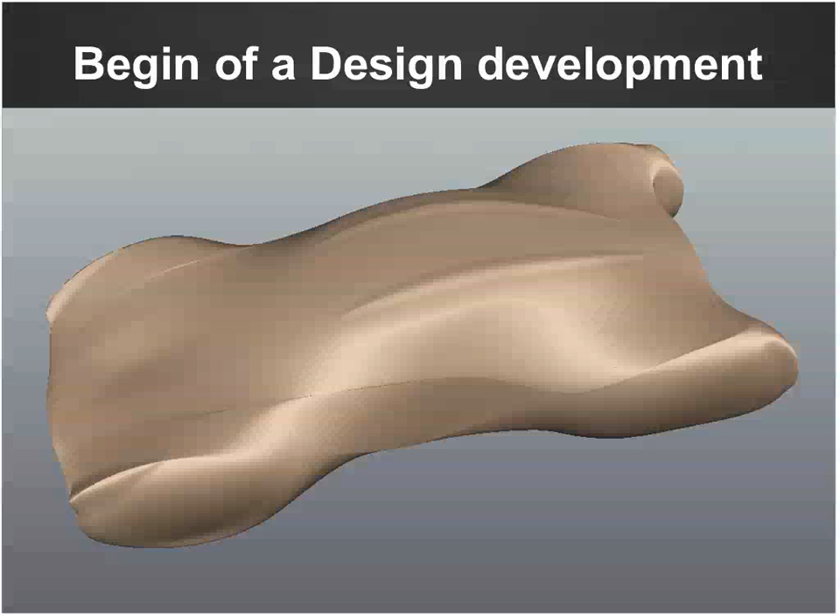Let's start with the beginning of the design development, and we see here that shapes will be created that are just standing for a kind of new design intention, and it doesn't have to be necessarily a shape of a car or whatever, just a kind of form study. This can be done using polygons, a subdivision surface, or a NURBS surface, which is the topic of this webinar. I want to concentrate on NURBS surfacing.

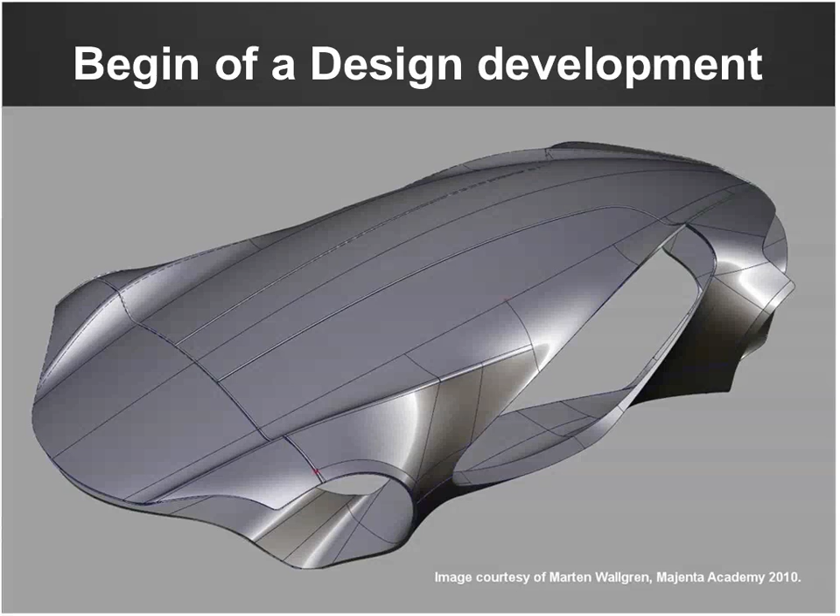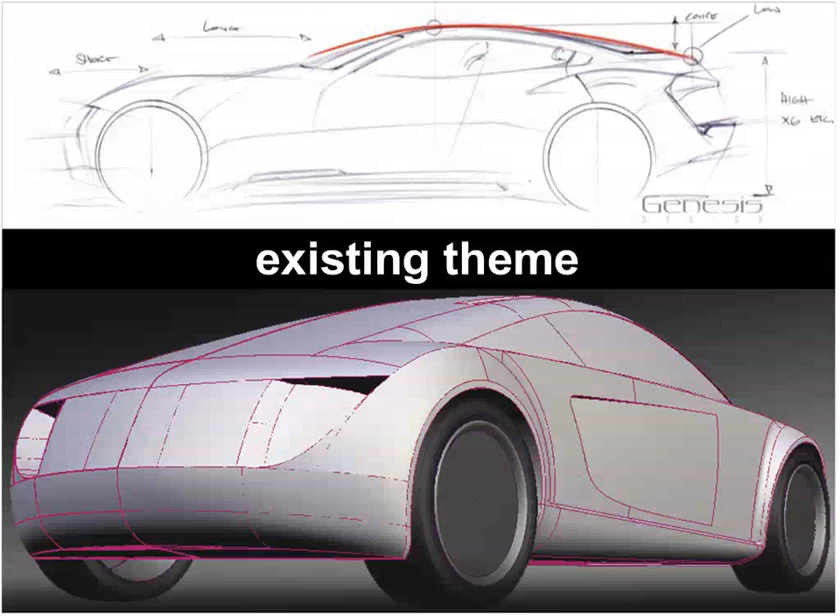The next phase in the design development could be evolving or developing an existing theme. Here we use NURBS surfaces to take several existing themes and bring them down to 3D packages, bring them down to engineering requirements of existing platforms, or combine them and bring them a little bit more forward. This can be done very well with NURBS surfaces, and these models are specific as well.

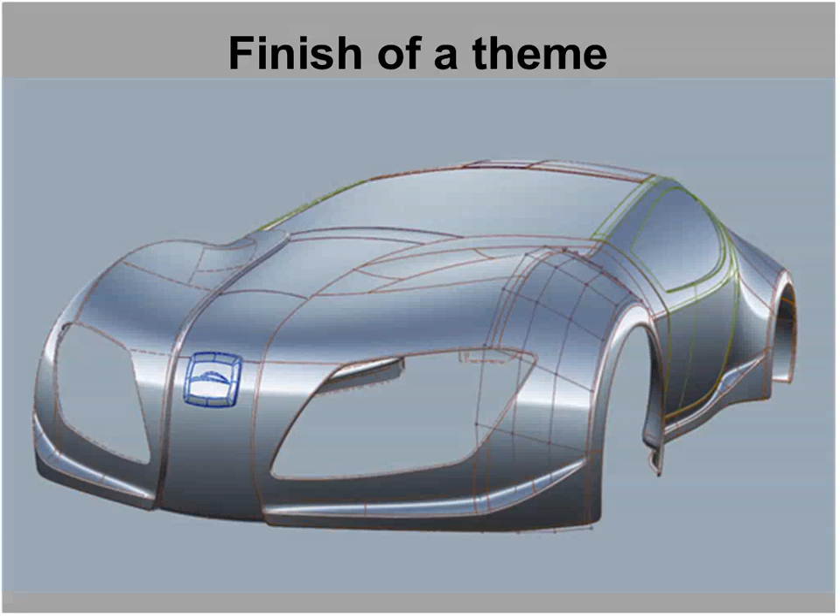And finally, we talk about the finishing of the theme. Here we talk about surfaces that have to be ready for tooling. These surfaces go into production, and they have to satisfy a certain standard. And this kind of standard can be specified, for instance, as Class A.

And here we come to this mystical term, Class A, because what is Class A? I figure that this is a question that many people have when I tour around the world with customers. Everybody's asking, what do you think is Class A? And it's very hard to find that common thing. Class A, at the end, is basically a bar. It's a measurement. It's a level that gives us an idea about the quality of surfaces.

We have to see that this Class A term is very often used, and maybe even came up with the automotive industry. Because in the automotive industry, we have the economic potential, the monetary potential to allow users to accumulate knowledge and to allow processes to have enough space to do Class A modeling. Class A modeling requires certain processes, certain efforts in staff as well as in logistics to be successful.

This Class A term specifies a challenge from my point of view. The challenge is to combine beautiness of surfaces with engineering requirements. So what is beautiness of surfaces? This is totally relative. The beautiness of surfaces can be seen, for instance, in the quality of the highlights, like in the picture that we see right now.

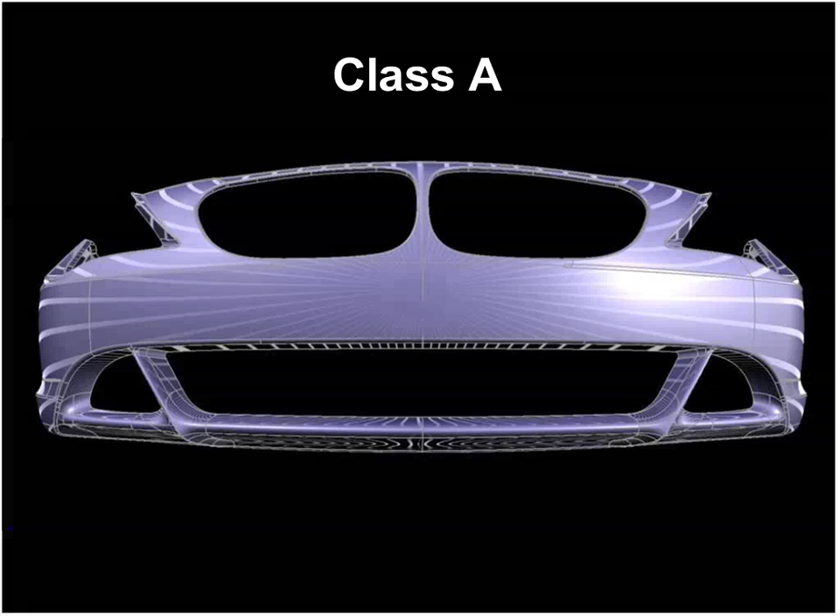So to come to a good model that maybe at the end will be specified as Class A, I am introducing in this webinar NURBS modeling. I can see there are two ways to do NURBS modeling. One way, you can call this direct modeling. That's a very interesting way, because it is very close to what sculptors, what artists are doing with stone, with wood or clay. They shape it like an amorphous material.

In 3D computer modeling, the operator of the software would, instead of shaping the material, shape CVs, control vertices, control points. There are lots of words for these things, and the operator basically starts often with a flat surface. And then he's pushing and pulling the CVs until he reaches the shape that he intends to reach, until he's happy.

When I learned that method, I was told to see the underlying surfaces instead of the feature lines. So when you see a car, let's say a Porsche 911 for instance, it's very hard to not see the beauty, the highlight and the curvy surfaces, but to see the underlying patches. Because we are distracted and we are used to see the feature lines, how they follow. But in this approach, we have to concentrate on the underlying surfaces and how to directly manipulate them. And that's why the word direct modeling.

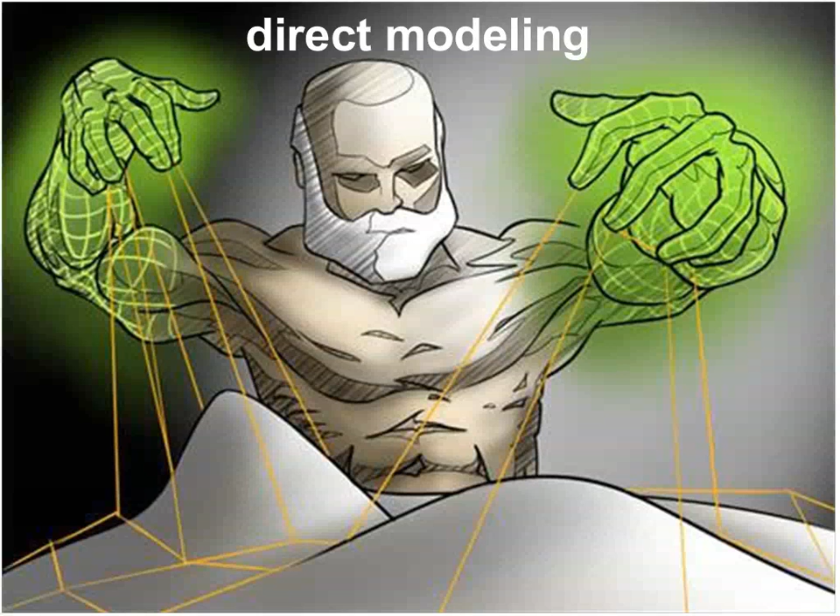Another approach has something to do with artists as well, but more like artists will draw. When you try to draw a car with a pencil on a piece of paper, you will start with drawing lines. Very few guys are trying to outline with a brush kind of shapes, kind of surfaces, or explain the shapes with sections. Mostly they will lay out curves. That's what the procedural modeling method is doing as well. They outline curves, and then they kind of hang in patches between the curves. They create a network of curves, and then they try to fill the network with surfaces.

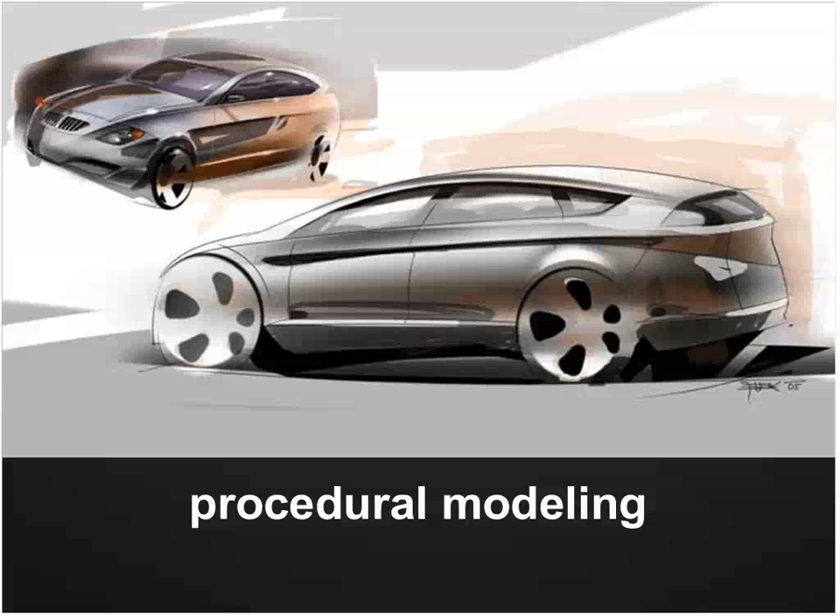Typical procedural software tools have the ability to say one surface should be in a certain way continuous to another surface. They have position, tangent, curvature, G1, G2 curvature, or G3 curvature, and all that stuff. I have to say, I'm coming from the direct manipulation thing. I learned to build a whole car, a whole surface model based on one flat surface. But over the years, I figured out that the combination of both makes me fly in the world of 3D surface modeling on computer.

I'm used to lay out my primary surfaces, my slab surfaces, as simple as possible, as clean as possible, and as light as possible, using direct modeling methods. Then I finish the model with transitional surfaces coming from blend tools, profile blend tools, or fillet tools, which are tools from the family of procedural modeling methodology. So the combination of both brings success. And I talk to lots and lots of people. That's my profession. I'm traveling the world, talking with you guys, and I can summarize that this combination of these methods is the way to go.

Let me right now go into a software. I'm using Alias Surface 2010. I guess that will be a software that most of you guys at least have. And I will do a little bit of work in that. I'm sharing right now my application. I believe that you can see right now a gray model of a car. I downloaded that model years ago from cardesignnews.com. And it is a NURBS model of a car, like everybody can see.

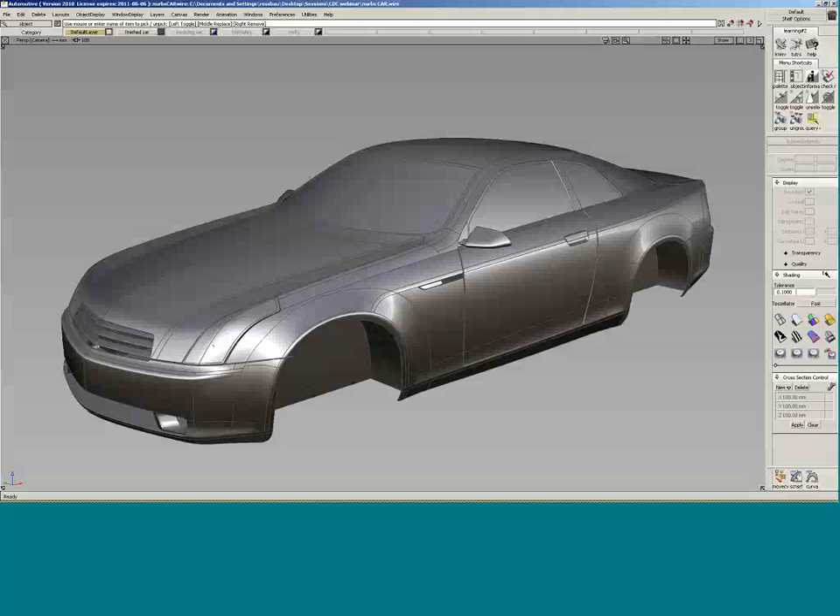But for me as a surface modeler, this car has way too much details to be evaluated. For instance, this car has all the fillets and all the flanges that we can see over here. We can see it over here.

So that is way too much for me to make a judgment about it. And I want to show you what I would do with such a model. So the first thing I did to find a good judgment on a car, I came up with the relevant surfaces. And we can see here the relevant surfaces. These are surfaces with no fillet and that are untrimmed. I want to see the surfaces in their pure appearance.

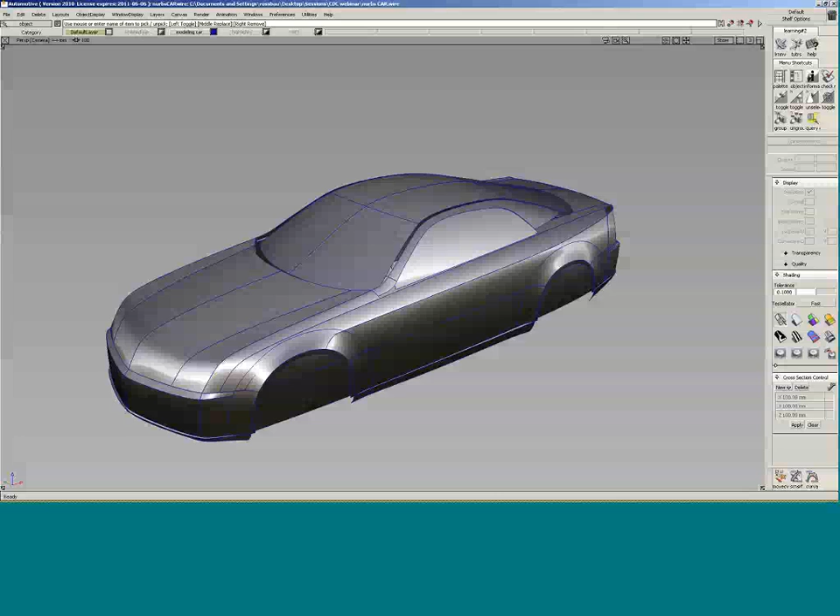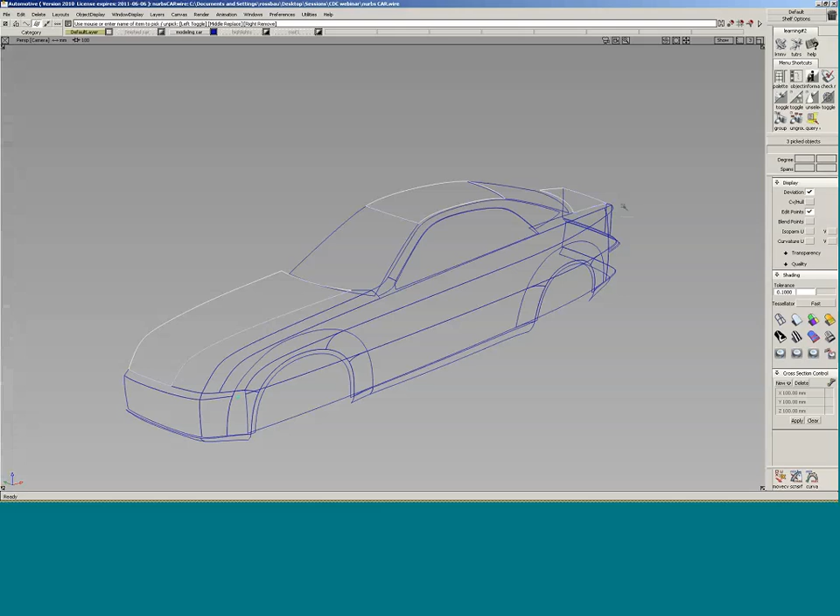And now I'm going to check what this surface model is about. So for this, I turn off the shading, and I am starting with a first kind of check. I like to see the half of the car, and I'm going to check the surfaces crossing the center line. Maybe this and maybe this surface. And there are a few surfaces here as well, so why not check them all?

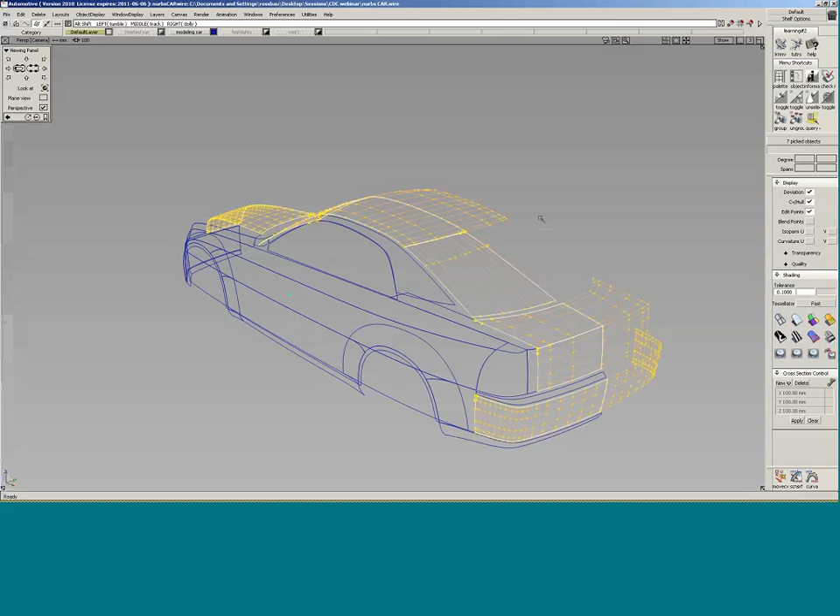And then turning off the CVs, I can see that some surfaces are built across the center line and just trimmed back, and some surfaces are just half, which would be okay, but probably we'll have some issues here. And I'm doing the next thing I usually do with those models. I'm going for the symmetrical view, and I'm choosing flat surfaces. So the trunk, the roof, that's enough, and the hood.

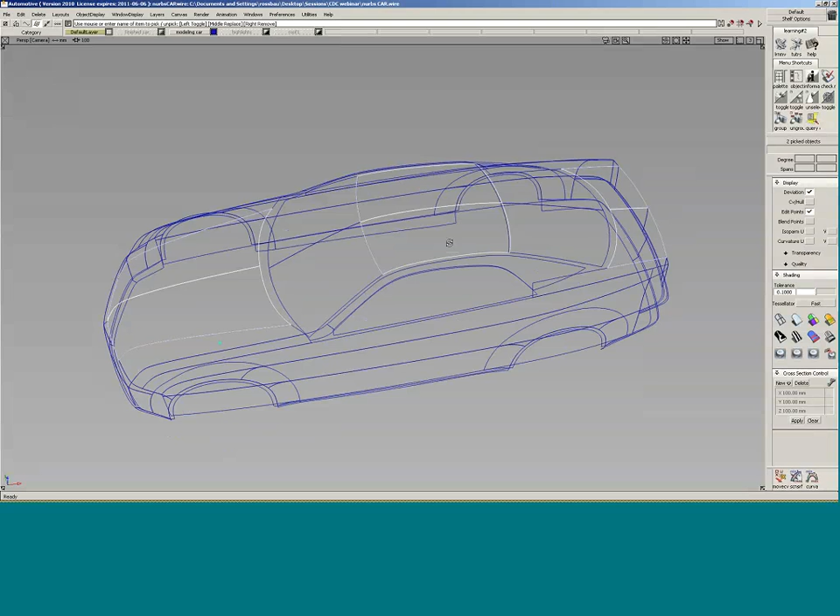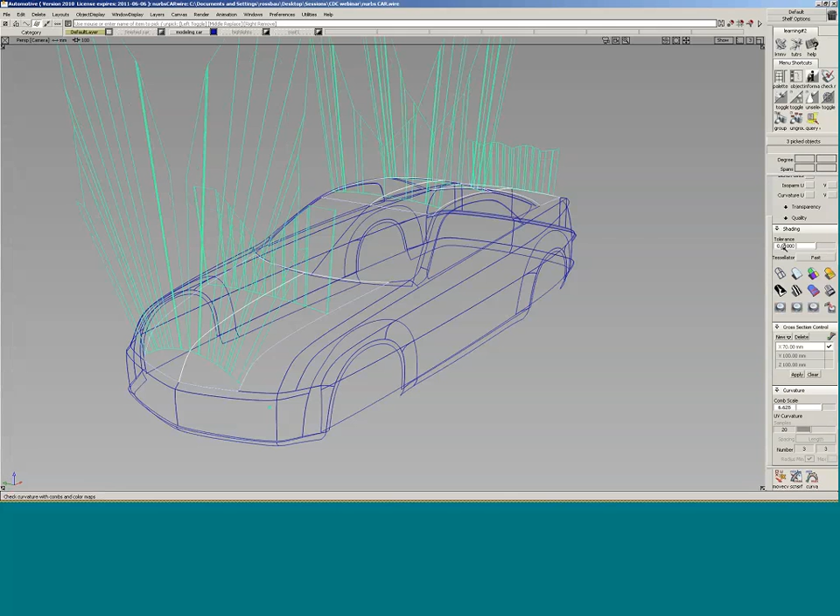And I'm calculating sections on it. Maybe the good thing would be to calculate sections every 70 millimeters. I think that's okay. And I'm asking the software for a curvature plot. I'm raising that, and I'm doing a better tessellation tolerance. Good. Here we are. So what I see from this view is that I have here a certain texture, a certain characteristic. And here I have a different characteristic. And here I have a totally different characteristic as well.

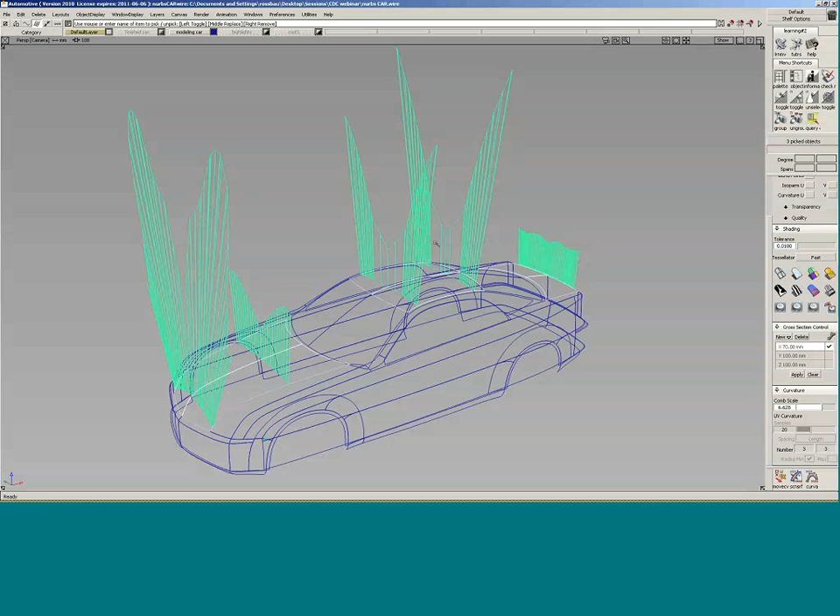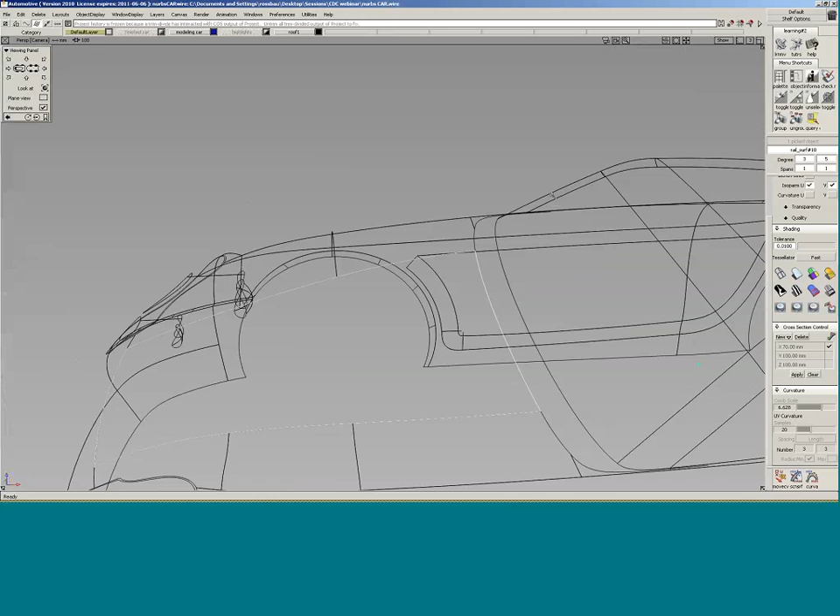So I would say in Class A, we cannot deal with that because we have to find a common thing. We have to find something that is bold. And how that could look like, I'm going to show. I have another model here. It's a real size thing. What I would like to see is something like this. I'm doing exactly the same thing as before. I'm selecting some flat surfaces, and I'm selecting sections again. Probably not every 70 millimeters, probably every 200 millimeters.

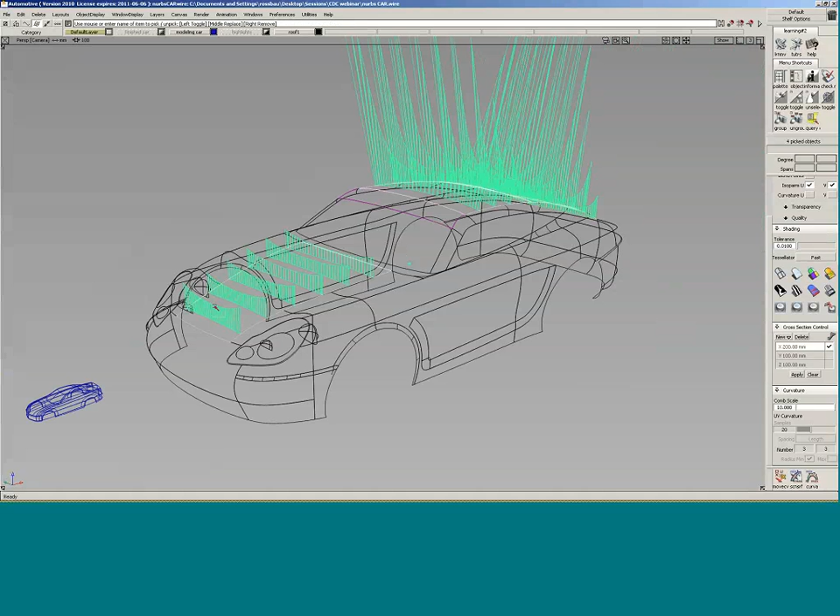That's enough. But what we can see is that the character is basically clear. I always have the same character over the roof, and almost the same character over the hood. So with this model, a Class A modeler could understand how the design wants these surfaces finished, because there's a clear indication of what this model should be about. I'm coming back to the model that I started with. I'm turning off the symmetry. I'm coming to patch layout issues.

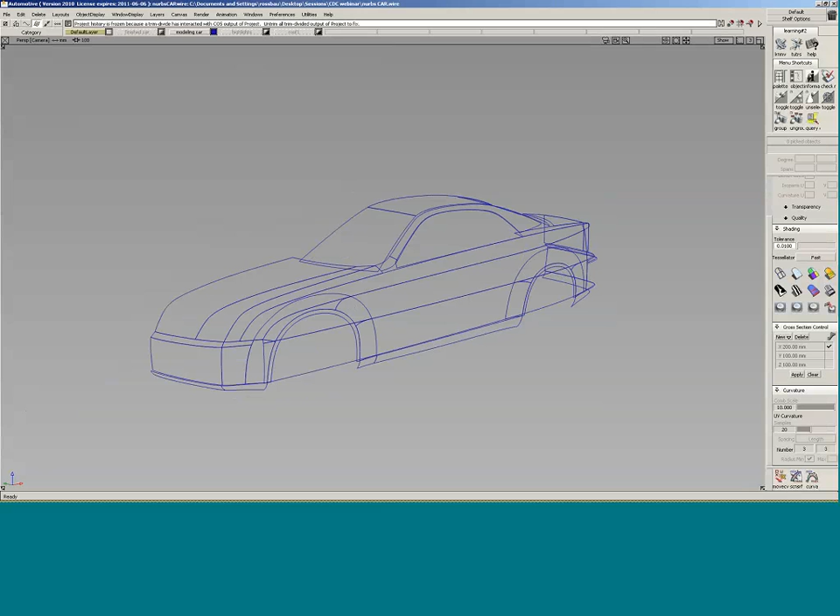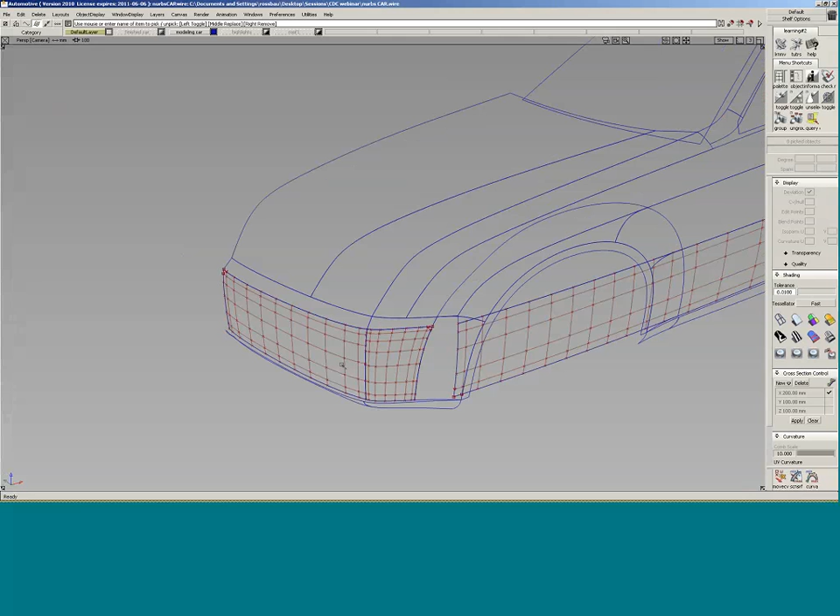I want to point your interest to these two surfaces and these two surfaces, and I turn on the CVs for that. We can see that in that area I have several shapes. Three. I have a flat shape, another flat shape here, and a round shape that should combine the two flat shapes. And it's the same over here. I have a flat shape, a round shape, and a flat shape.

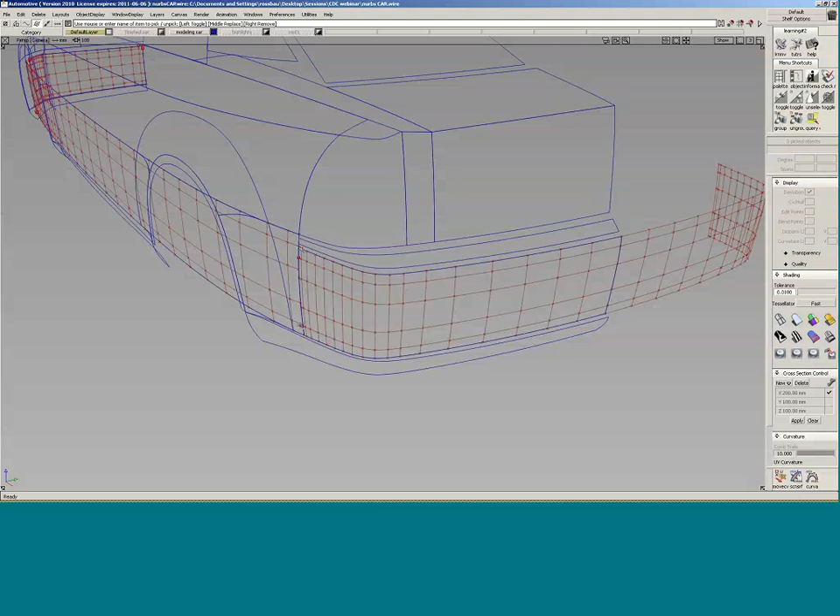The problem right now is when we come to Class A criteria, very often I probably have to change that radius. I want to change it a little bit. Even when it's a smaller detail in the car, I want to change it, but I cannot, because this is one surface. I have to change the entire surface, and that surface division over here might be wrong, because maybe it is here, or somewhere else. Basically, the flat things and the round thing should be visible in the patch layout.

Now you can say, yeah, but with this surface, when I move that CV, nothing happens over here. When I move that here, nothing happens over here. That is right. But this surface is very heavy.

I don't think that the heaviness is a big problem just because of the heaviness. But let me show you this. I calculate sections on this surface here. And maybe not every 100 millimeters, that's a bit too much. Let's say every 50 millimeters. And I get a section there. And I turn the scale of the section up a little bit. And then I do an even finer tessellation here.

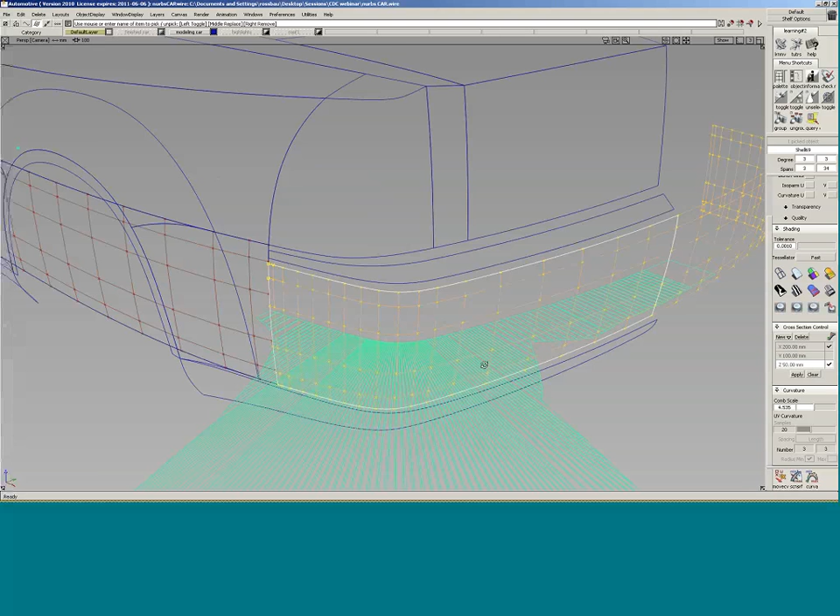So basically what you see here is the shape. Regardless of that thing, I don't care so much for this, and we can debate whether it's good or not. But you see here along this way that that shape has several G3 breaks. That is not good at all. In Class A, or let's say in automotive, you cannot deal with that. That will never be accepted. So that surface cannot work in terms of the internal G3 breaks, plus the form is not

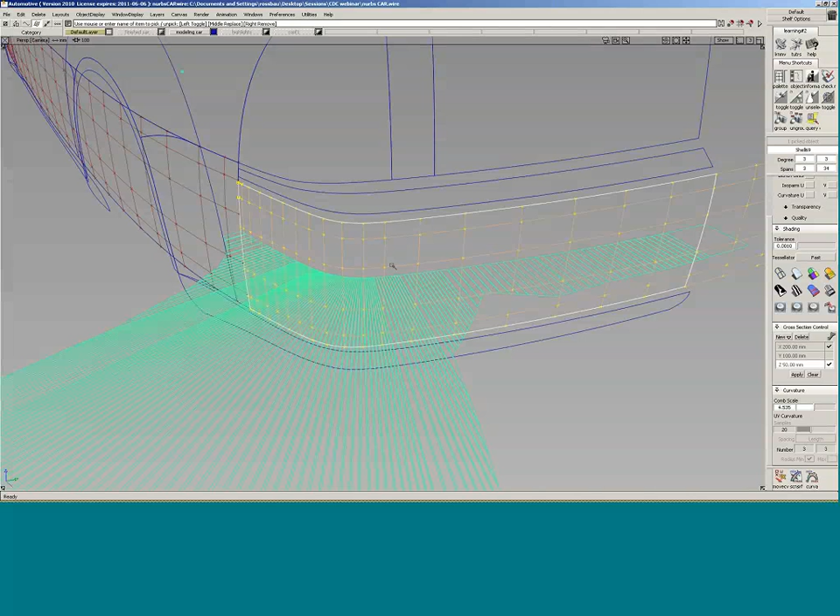correctly interpreted. I saw on the attendee list a couple of guys from the automotive industry, and they will confirm that. We have to interpret the shape, and there are three shapes, and I have to see the shapes in the patch layout. I think that is the message that I want to give you guys. Good. So let's see what is the next thing.

The next thing I'm going to do with those kinds of models, or with any model that I get and have to do something with, is I would like to know what kind of highlights I can see. So let's say I get these two surfaces, and I use hide unselected. I'm using no customization right now, so I want you to see where I get my tools from. I'm using the palette, the evaluation tool, the isoangle tool, and it always appears like that.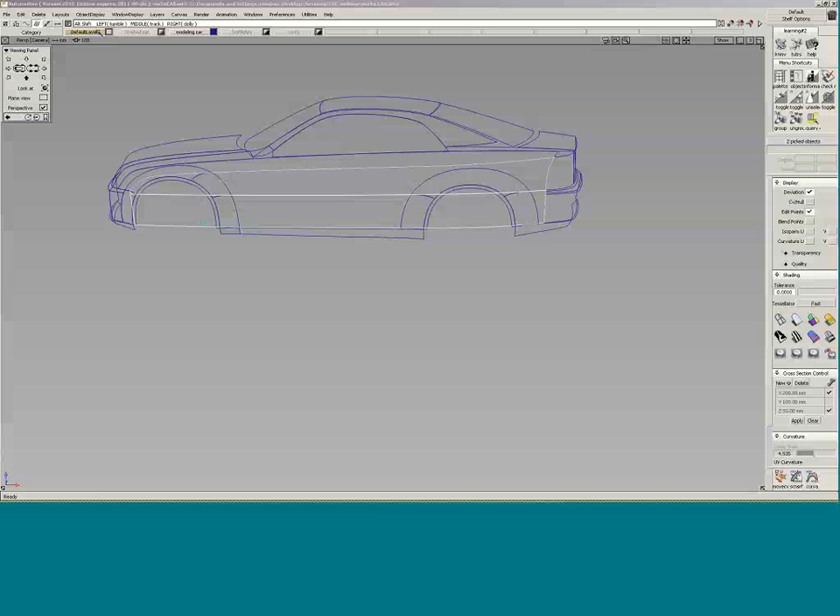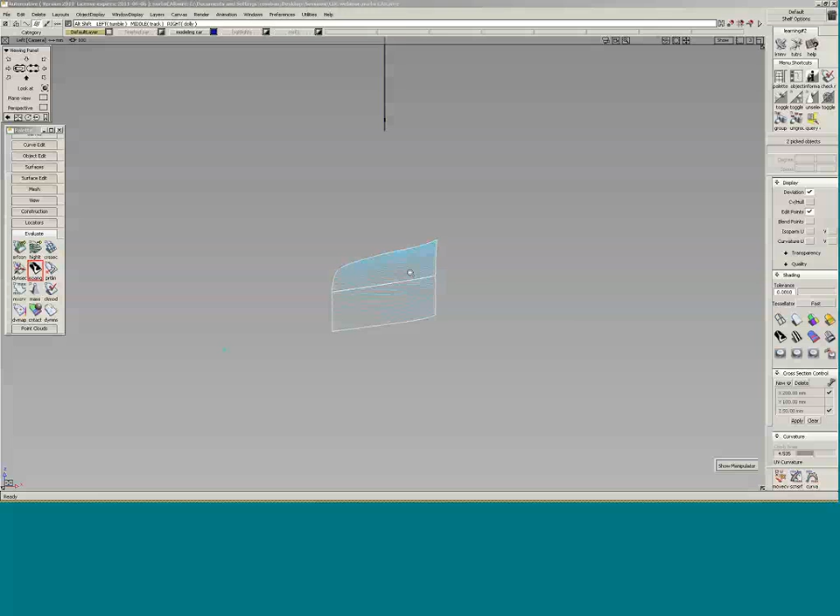So I go for multiple. I want to have many more, probably 35. And I'm going for no shaded surface, but visual curves. And I can probably hide the manipulator. Something like this. That means I can now use the same thing in the viewing panel. I can use a distorted view and see what I see here. And the highlights of the patches here, these are the major patches of the body side, are not good because they are not clearly defined here.

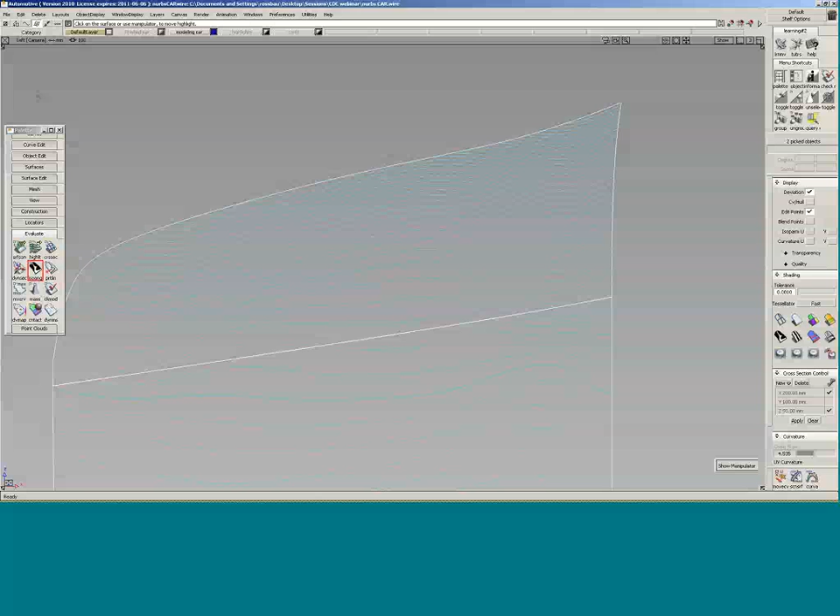So, to make a long story short, these highlights are not okay because they have too many characters: concave, convex, concave, convex, concave again. That's not good. So I would test that. I come back with perspective on, perspective off, and I can delete these visual curves as curves on surfaces. And right now I would like to show you another thing. I think it's a trick.

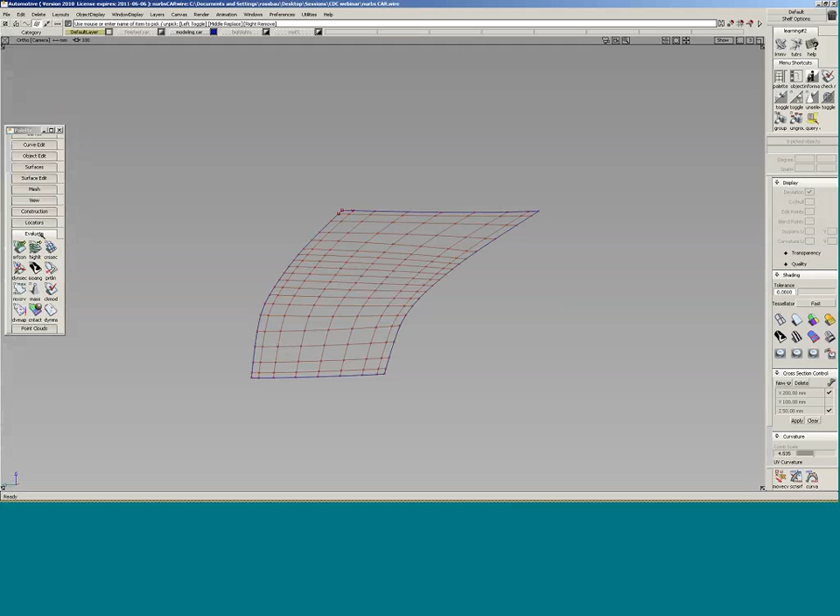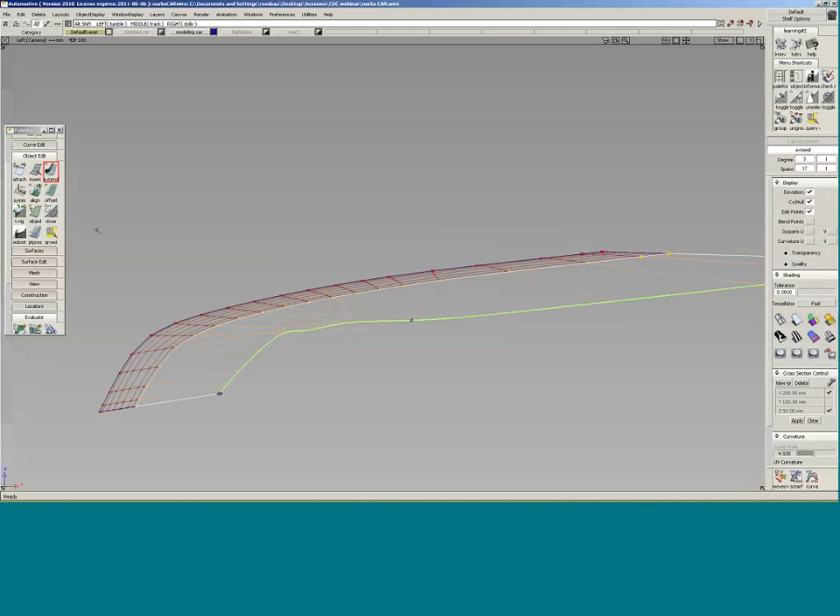Let's say we talk just about this curved surface, and that surface is an untrimmed surface. Regardless of the fact that I don't like it with lots of spans, I can go for object edit, extend with linear on, merge off, and extend that thing very long. So from the side view, I can see that the first hull is pretty okay. It's concave all the way. But the second hull is totally creepy. Sorry for the English word, but it's totally undefined.

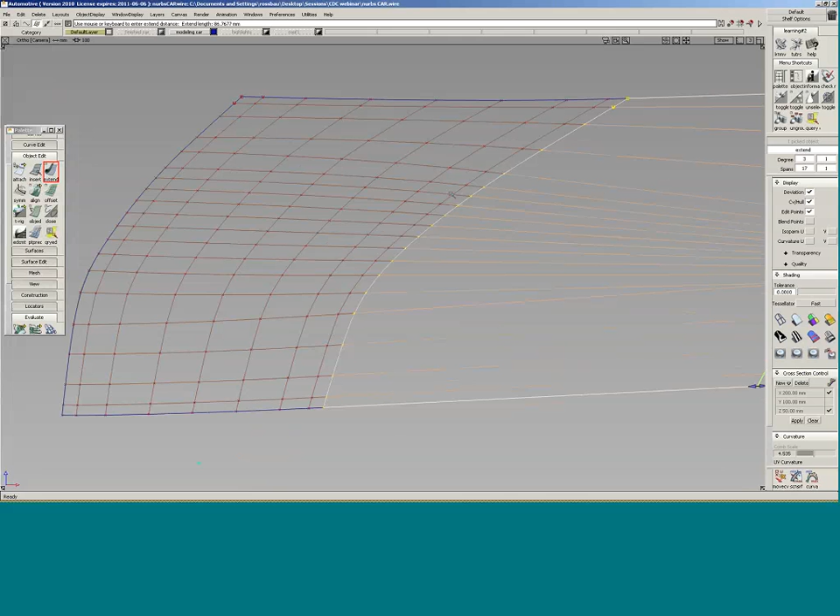It's giving me a clear indication that in that hood here, this line is somehow wrong. You cannot see it, because when you look at this here everything looks nice, and when you see the curvature combs, or maybe even the Gaussian, everything is fine. So there seems to be no problem. But there is a problem, and finally, with the extrapolation, you can see it much better.

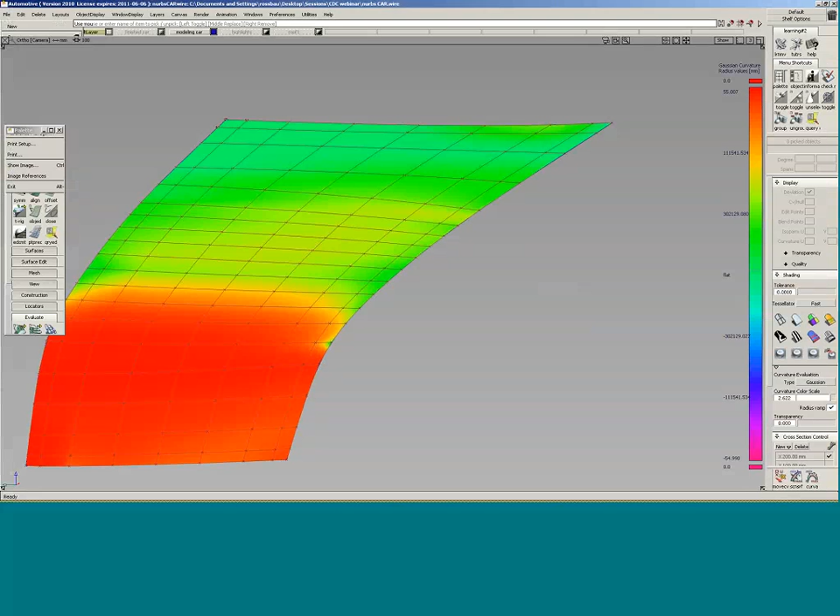And with this, I would love to open another file where you can see something more. This is a file with a fender, and I want to point your interest to that surface, right?

So that surface here looks nice. We do this, we do the vertical, no, we do this, and we put here a little bit more. That surface looks quite okay, right? When we go for the drawing style and we want to see the surfaces, see, it's a little bit different. Looks

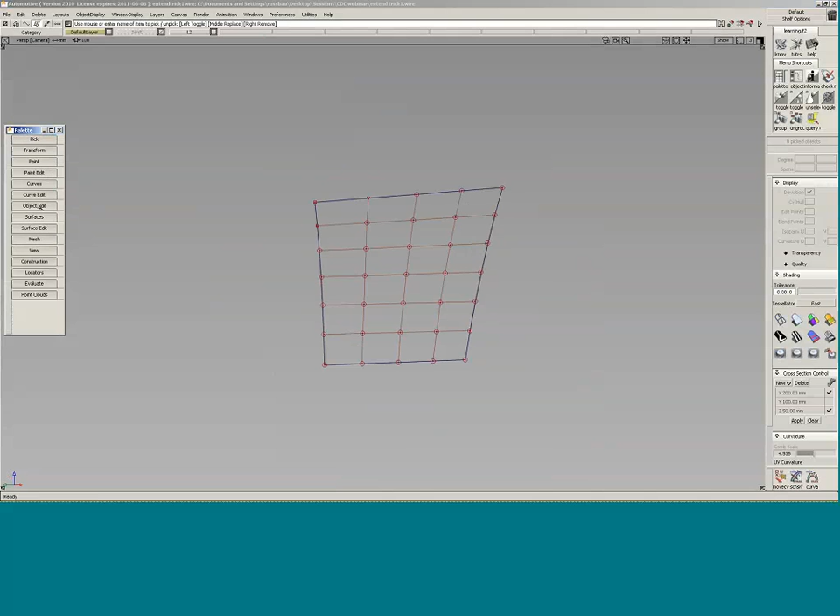kind of okay. But what we really could do with that is we go into object edit. In the extend tool, we go for linear on, merge off. We say we want to do this here, and then we want to do this on the other side. And now we can see that

the first line, that line is pretty okay. But the second line is really zigzaggy, and that means I have a problem in that line. The CVs are not in conjunction with this. Same thing is with this here. That line is pretty okay, but that line is zigzaggy. That means that that line here doesn't work together with this one.

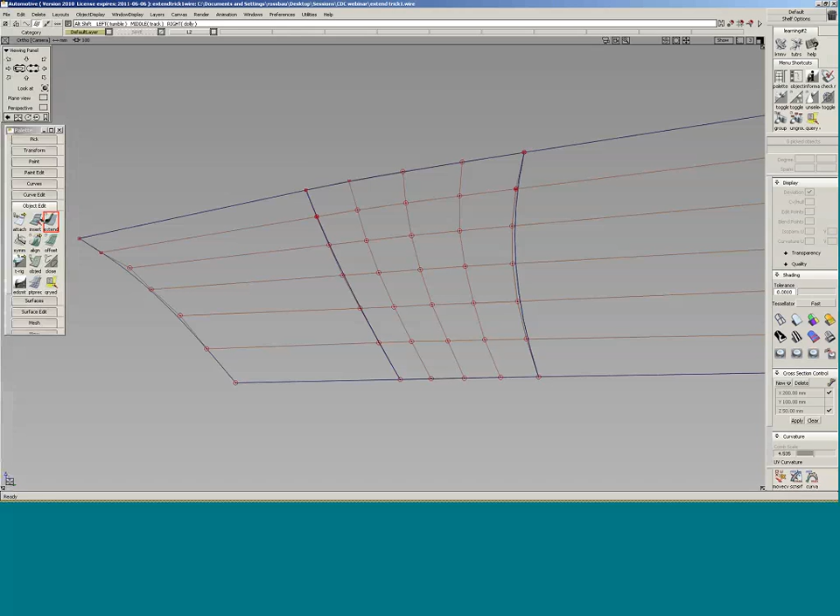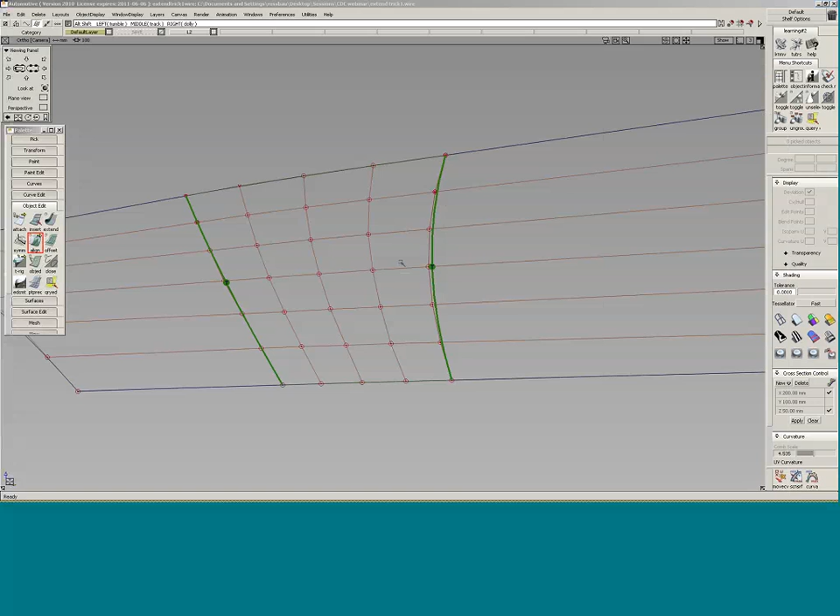How to correct that? I usually use object edit. I'm using the align tool, and I'm aligning that guy here, but use tangent. And then I'm aligning this guy over here using tangent. And now this is historical. So I can right now take this CV and move that CV. Very fine. You can move that CV, and that CV will be adjusted.

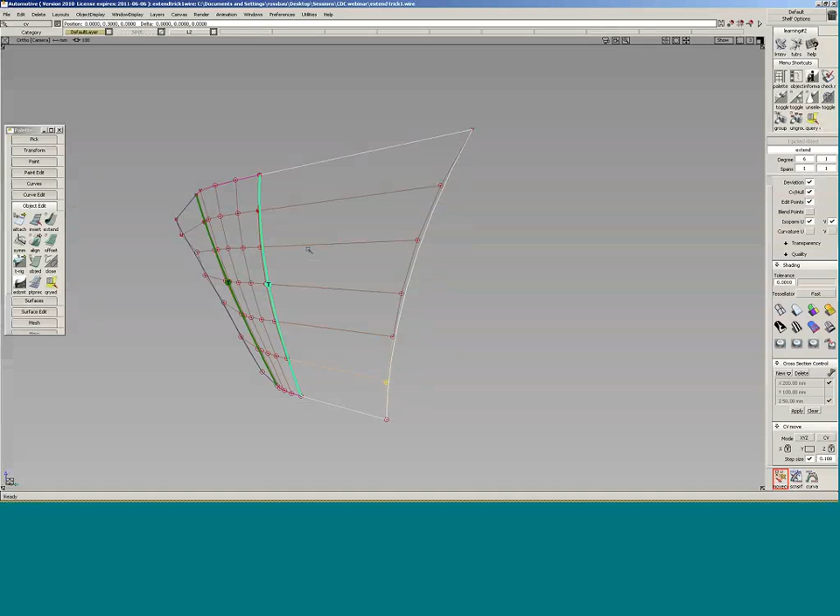I can move that CV, and so I'm able to adjust that surface with these helper surfaces to make that fitting, matching to this here. And I do the same thing on this side. With this, I'm able to do a very good kind of smoothing of the inner kind of things.

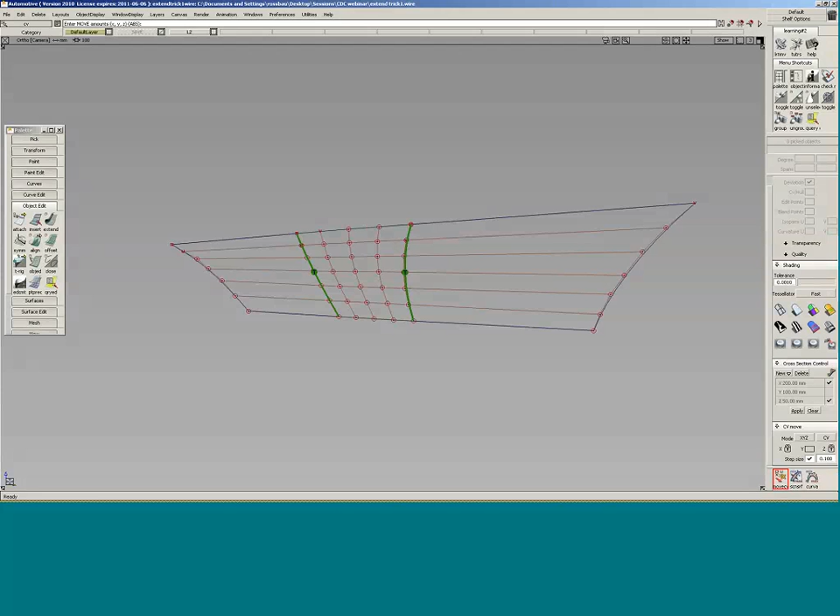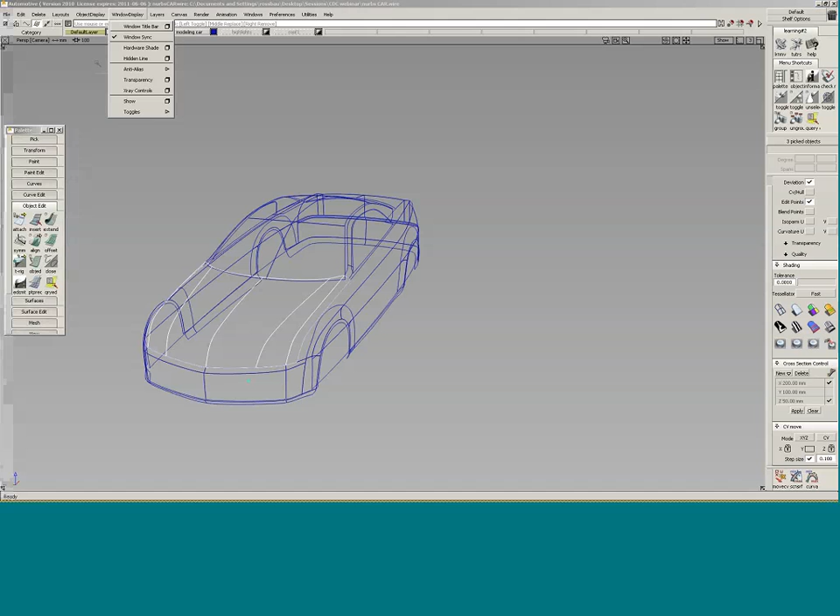So I'm going back into the NURBS car that we had at the beginning, and I would like to show here another thing. With these surfaces, I use hide unselected objects. I just don't want to see this. And when we see this here, and I even use non-perspective, I can see that line here, right? It looks concave. I turn it a little bit, it looks almost flat, and then it looks convex.

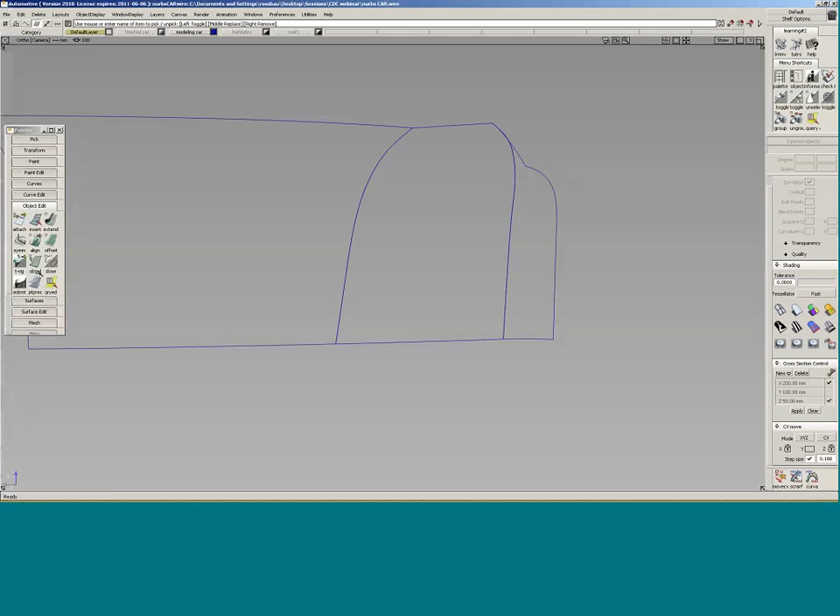Pretty good. I can even see that when I go for locator, and I check here, I can see that curvature locator. I'm using the middle mouse button and then the left mouse button, and I can see that curvature plot is pretty straight. Here it's a little bit, but that's okay. That is pretty good. But when I see this here,

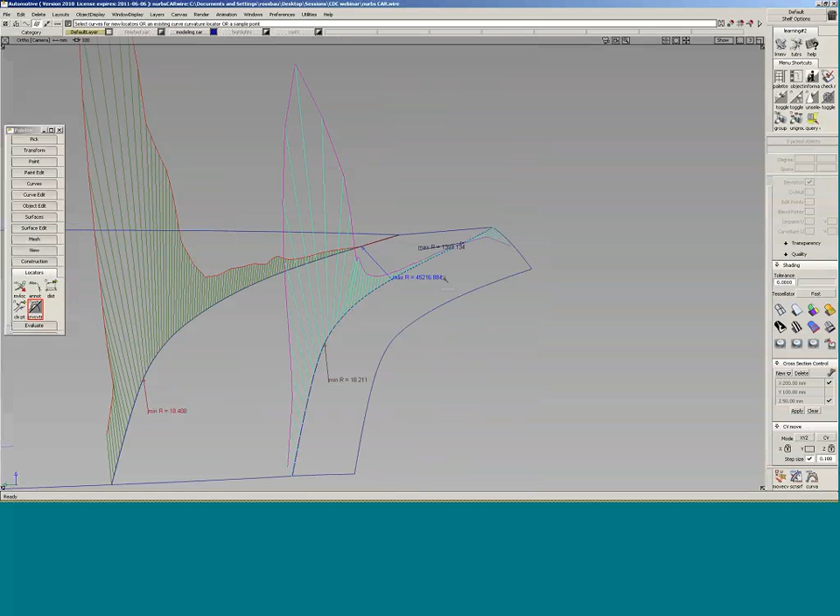this looks really wavy. So that looks here convex, concave, but I cannot find a point where it looks straight. When I watch it from a view here, I can see that the curvature plot is really waving, which is something we don't like. We would like to find clarity. We would like to find harmony. When it goes from convex to concave, it must be flat somewhere.

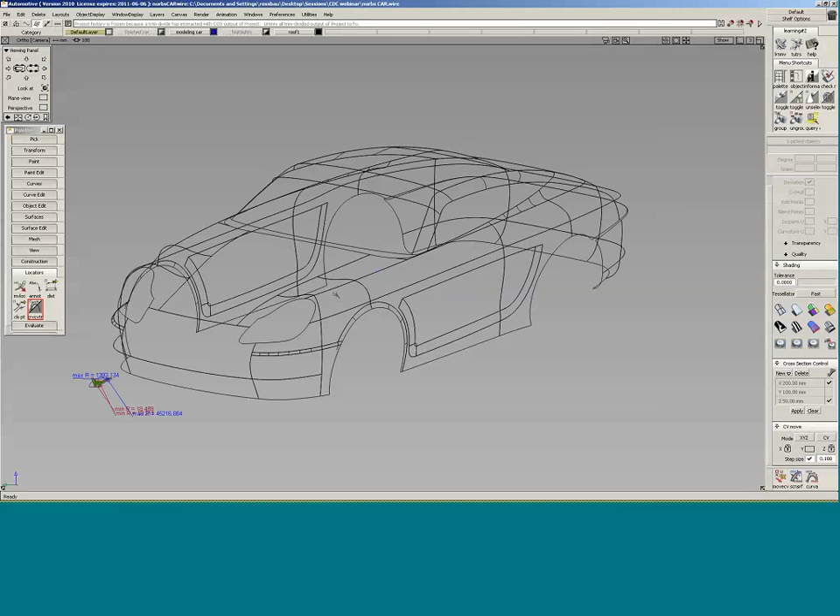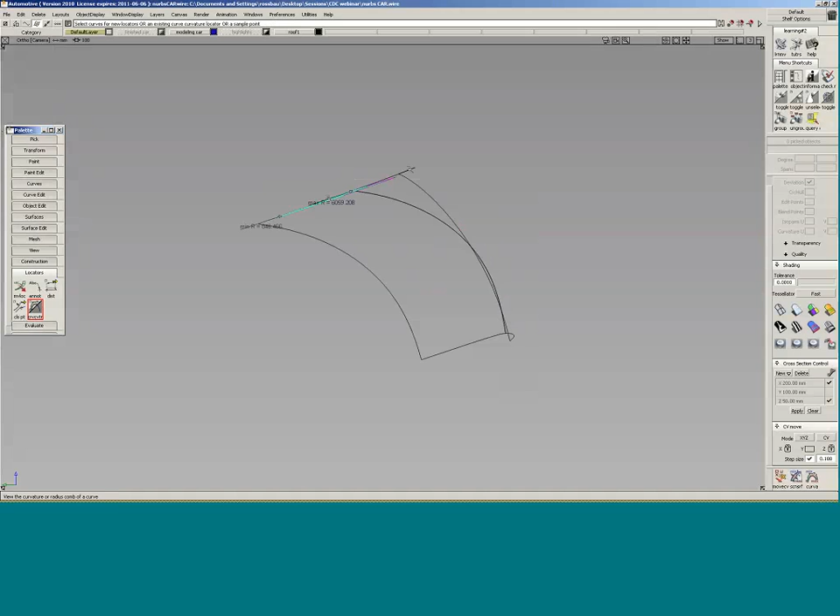What could I expect here? Or what do I mean here? Let's say we take these two surfaces, and I say hide unselected objects, and we can see maybe that line here. That line is straight, it's convex, concave, and straight. So when we do a curvature plot on it, we can see that the curvature plot is on a plane.

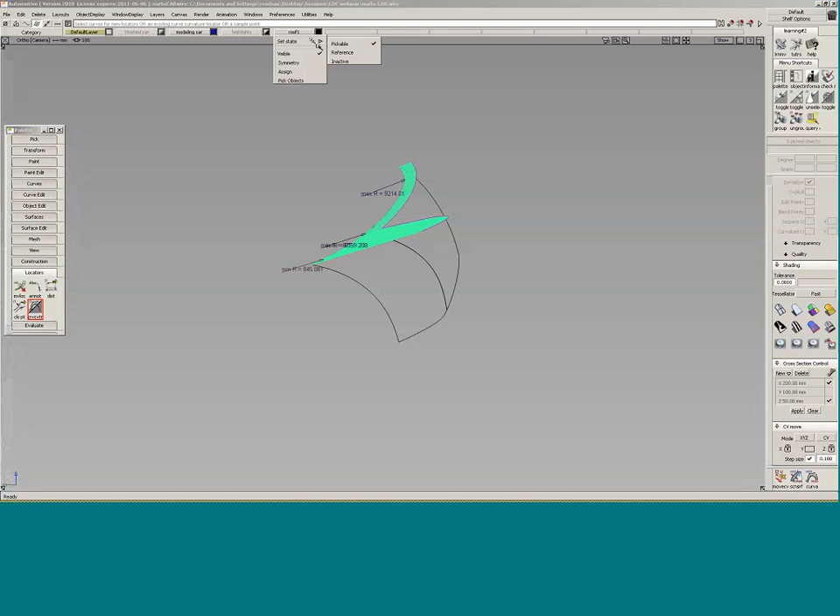We like that. That's harmony. We like that, class A, because then we have a defined character with a defined shape that we want to go for. And that is something that a class A model or a class A modeler would look for. And these are the first things I would look for when I see the car.

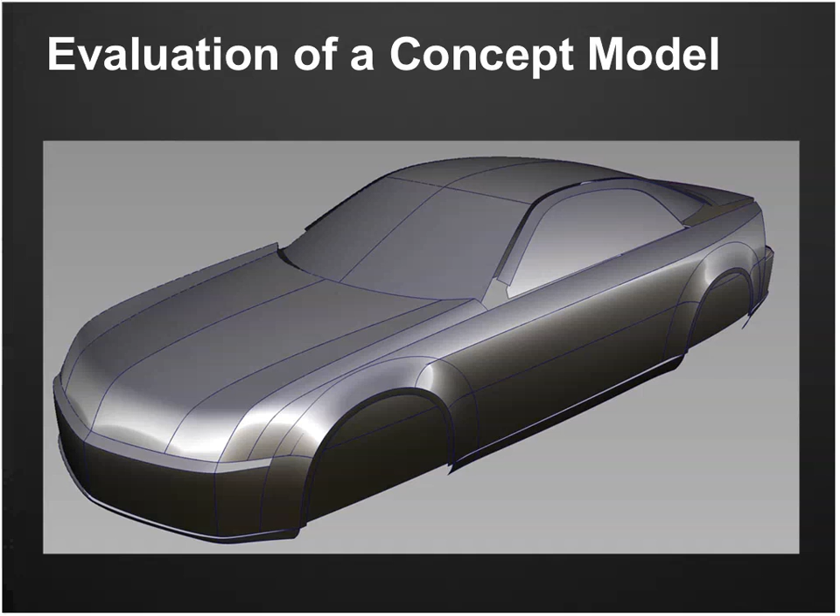Let me go back to this presentation, and I will look more into the Class A thing. Mr. Barry Hale, a guy from England, in 2009 left some words at an automotive day in Munich about Class A. And Mr. Thomas Saline, at this time the digital design manager at GME, brought this definition for Class A. The big point here is that he says that Class A modeling or good surface modeling is based on the knowledge and the skill set of the individual user.

So the whole thing is user dependent. So software is not a guarantee for Class A. You need the skill set and the experience of the user, which is, from my point of view, the biggest thing. That's why I'm talking to you, so that you understand that we have to work with your users. You have to work as a user to achieve the skill set, the knowledge that is necessary for Class A.

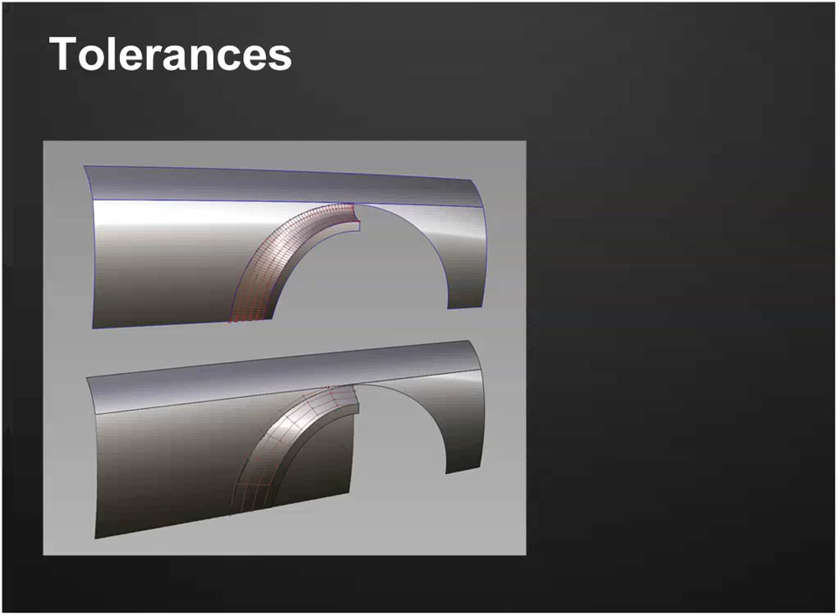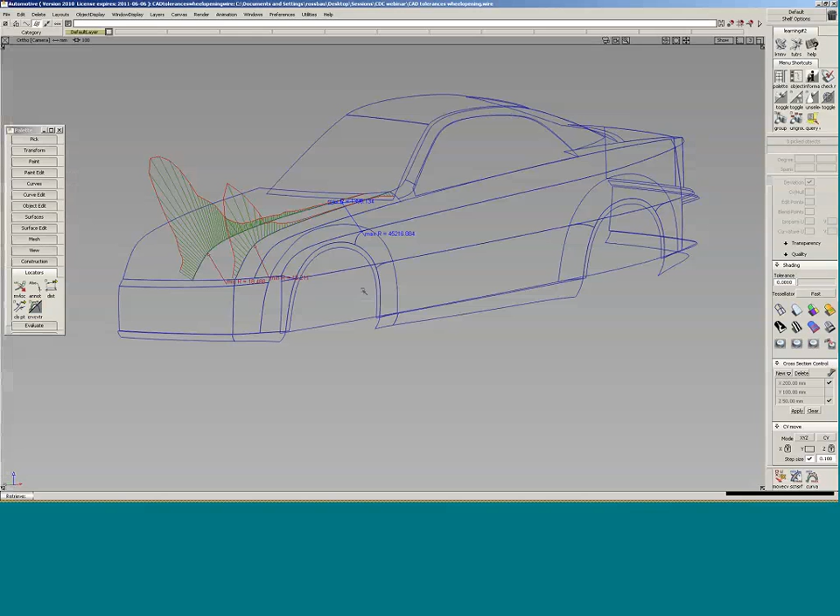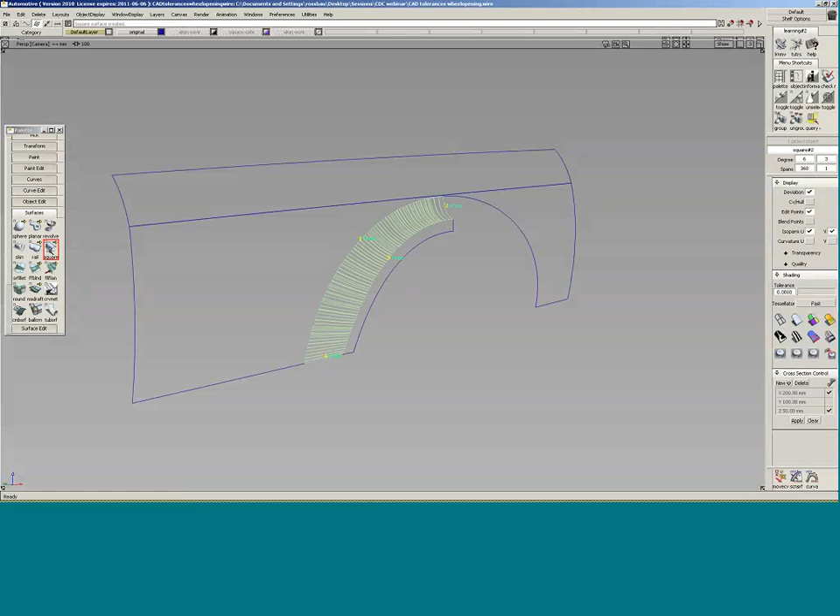Good. Let's talk about the topic with tolerances. Here we have something that is very important, because all of you work probably for CATIA V5 or for UG NX, 0.001 millimeter gap tolerance. So please look at this. When we go for a file like this, and we have this here, and you want to fill that here with a surface, you probably would do it like this. You would go for square and say 1, 1, 2, 3, and 4, and you get a surface here. So you can see there are a lot of spans and a lot of weight.

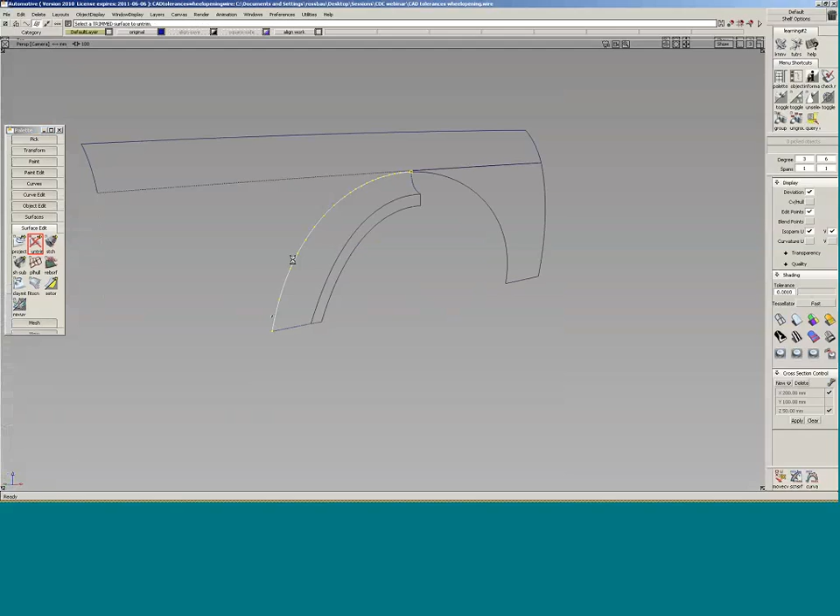I go for fixed here, and believe me, I want to shorten that. I can play here with what I want, but it will always be with lots of CVs. Not a good idea, especially when we work for tolerances of 0.001. So what you could do is this. Yeah, I have exactly the same thing. So you could say you do here an untrim. And you say you create an edit point curve from here to here.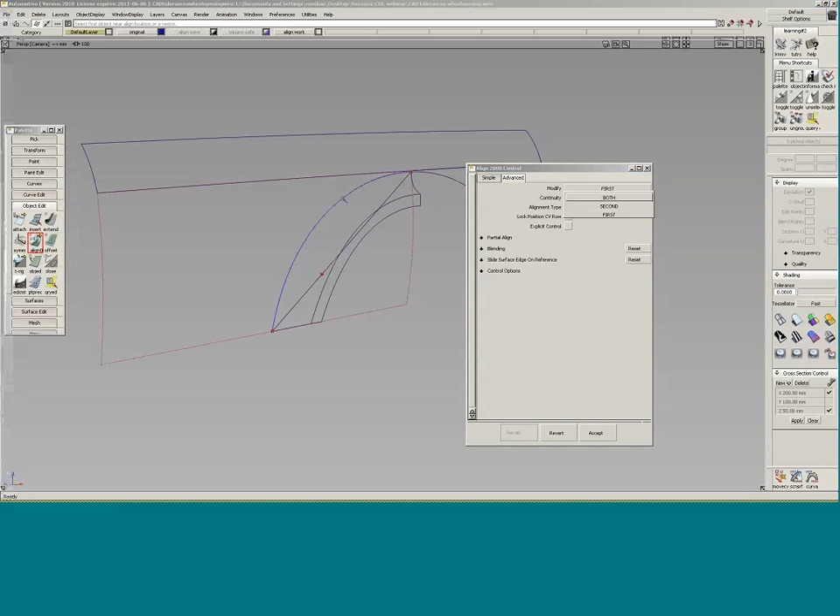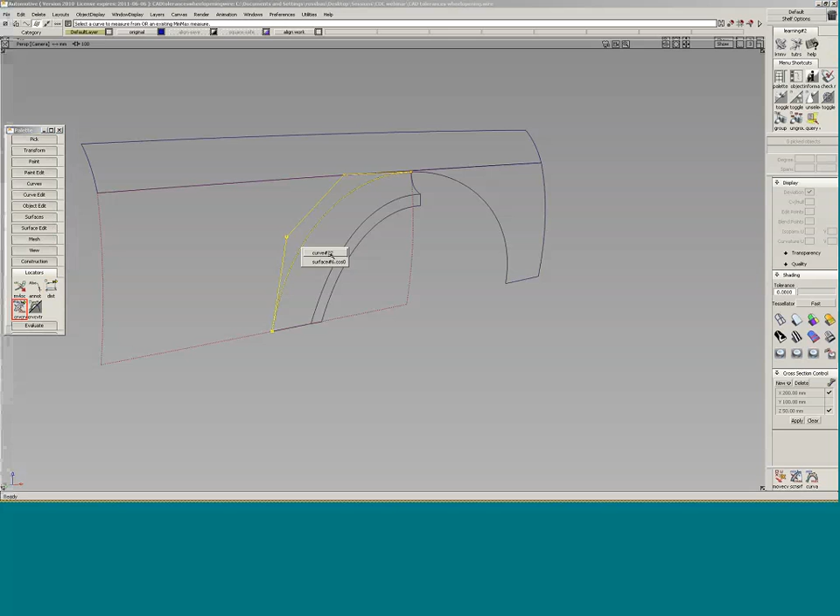And in 2011, things will change. But in this version, you go for the Align 2008, and you go for line second, and you ask first the curve on surface, then the curve, and then you ask for explicit control. So you will get a curve like this. Then you ask for a locator, and you ask for the deviation between the curve and the curve on surface, and that is roughly 0.6. So you go with the curve much better.

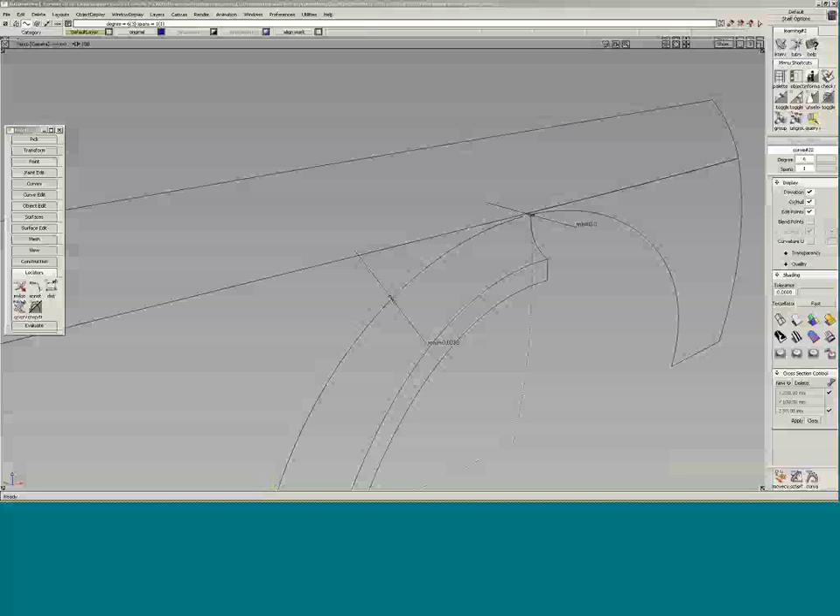So you give them, let's say, 6 CVs. So you go for 0.0017, which is okay. You go close. That's everything you need to know. You just go as close as you can. And then we delete the curve on surface, the old curve on surface that we don't need. And then we have a surface here and the curve here, and we ask for hide unselected objects. We go for the side view, and then we untrim that surface.

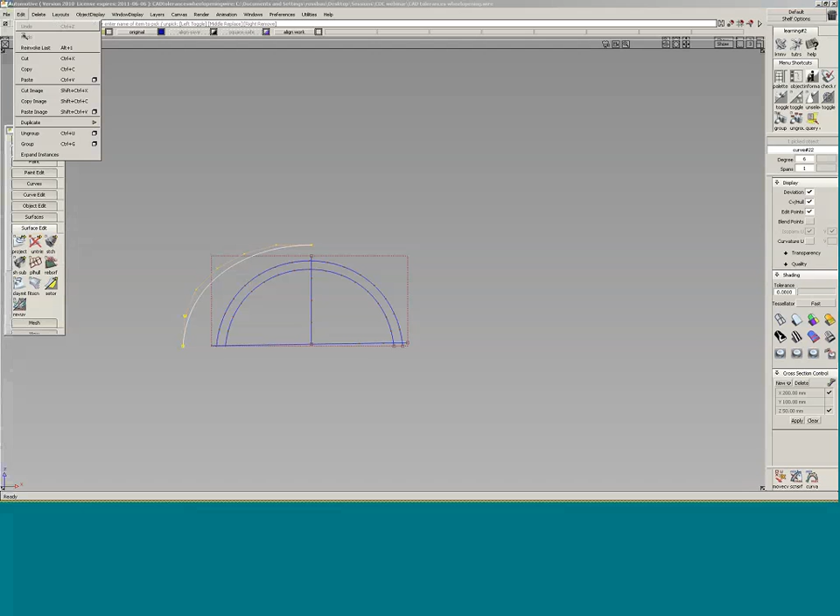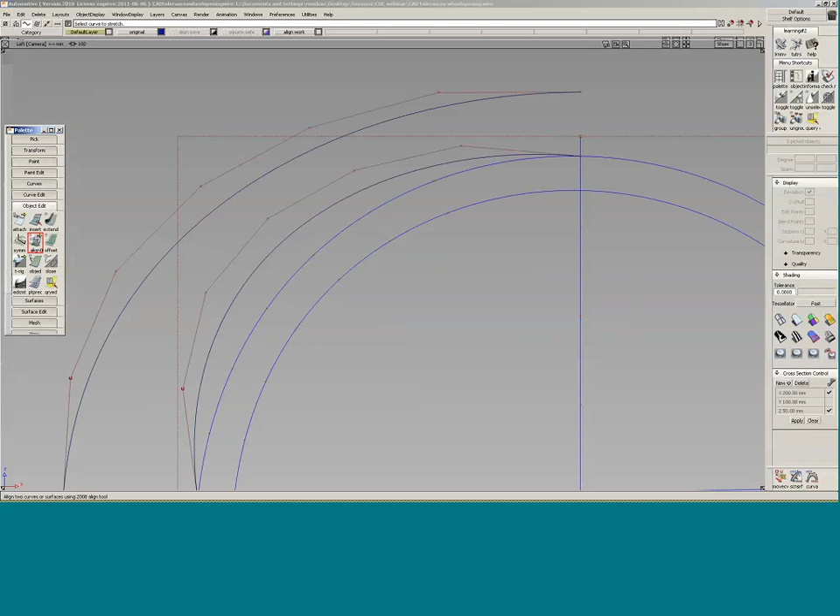And then we take the curve that we just created, and we duplicate it, and I put the pivot there, and I put it in here. There's a nice tool here called curve stretch, and I put the white ball in it, and I put it in here. And now I'm going back to my align tool, 2008 align, and I ask second. I ask this guy and this guy, and now we will calculate, and I ask for partial align. So I get a surface like this, a curve like this.

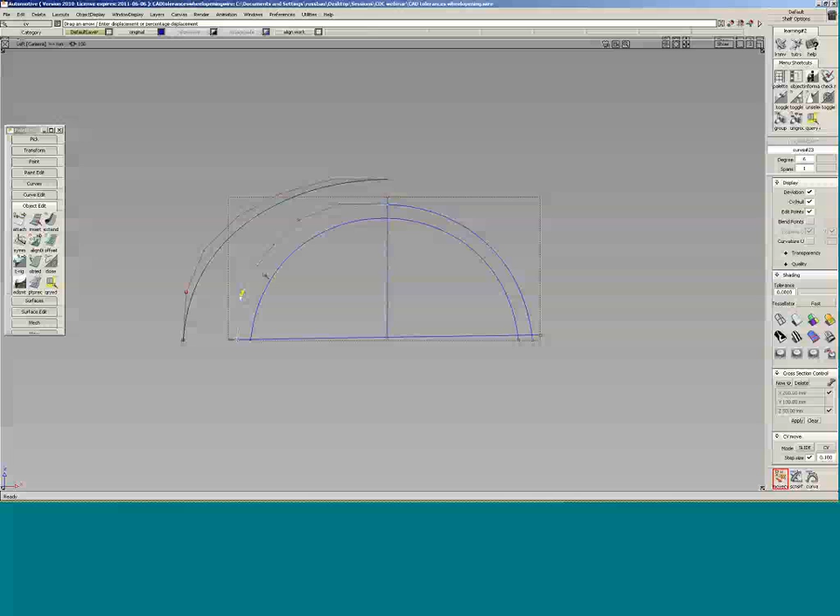And now I'm using here the possibility to slide, and I'm sliding that down. I don't like this here. I'm sliding that a bit down and invoke the history. Sliding that down. Invoke the history. I'm sliding that much more down. So these two curves look pretty okay. So I take these curves, I say hide unselected objects, and I do a skin between these two curves. Between this and this. It's clean. It's a very clean skin. And I'm even asking for just degree 1, so that I get a very defined, clean skin.

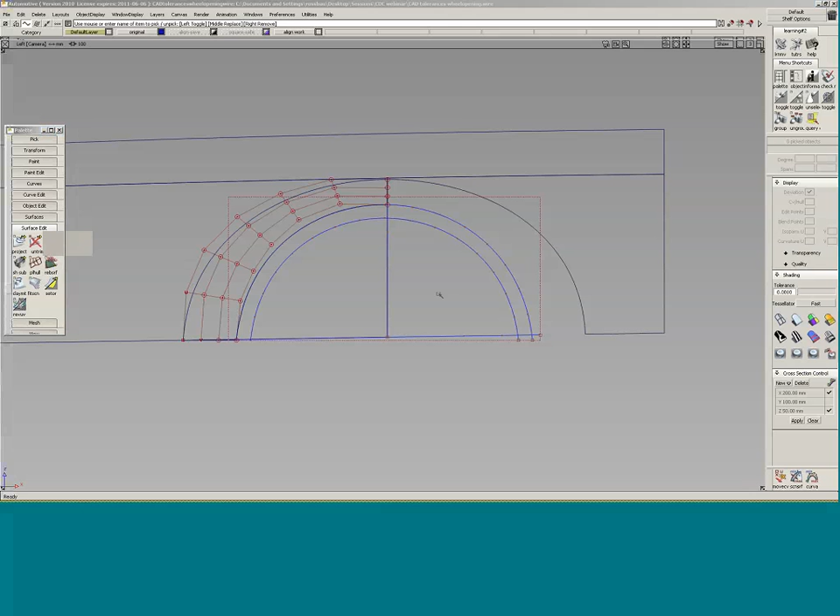So then I use the curves and I delete them. And then I say I want to see everything, and I trim that surface again. So what I have now is this. There is no curve on surface here. No curve on surface. So what you do is you use the new align tool, and the new align tool has here edge and project. Edge is when I would have a curve on surface here, but I don't have one.

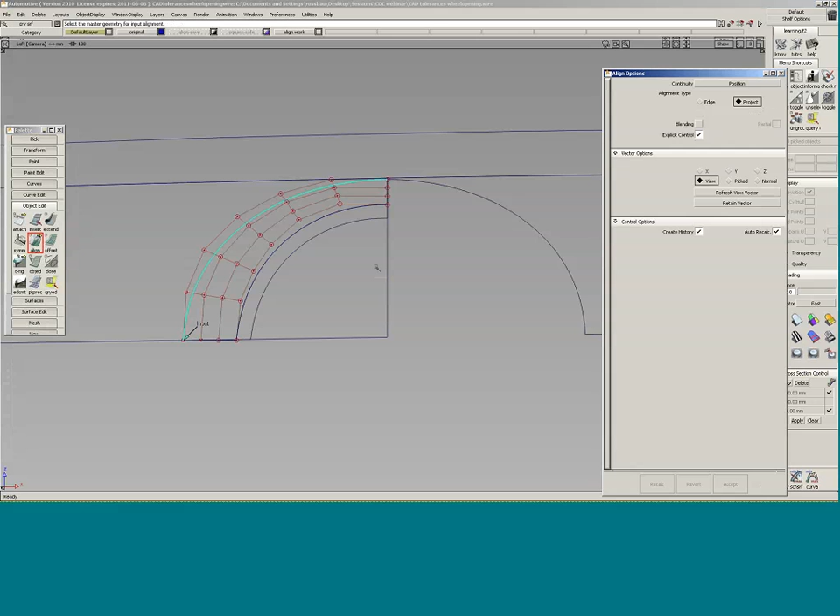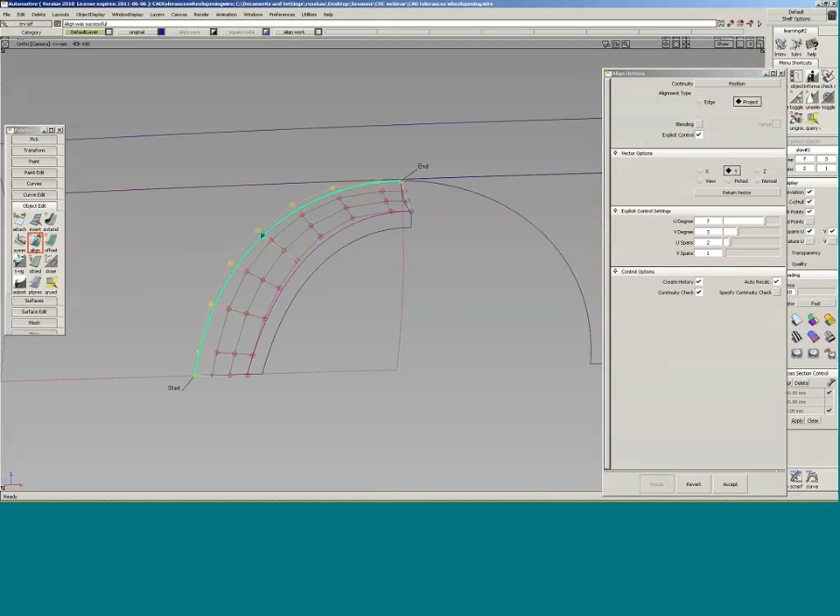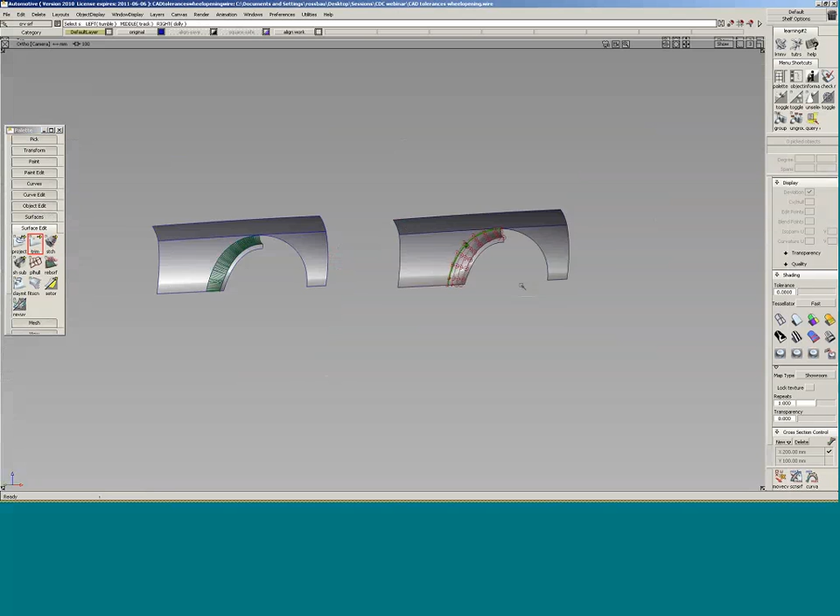I use project. I'm asking this guy to this surface, because I like it from this direction, and I'm going for 7. Oh, it's not doing that, so probably I'm going for 1 span, and I'm able to do it here, and then I'm giving here an explicit control, and a curvature continuity, and I have here a clean surface set that works with that wheel opening solution. So I have this thing here, and I have it here. That works pretty good with a tolerance of 0.005 in V5. Yeah.

The next thing I don't show in the software now because of time issues. I'm running out of time here.

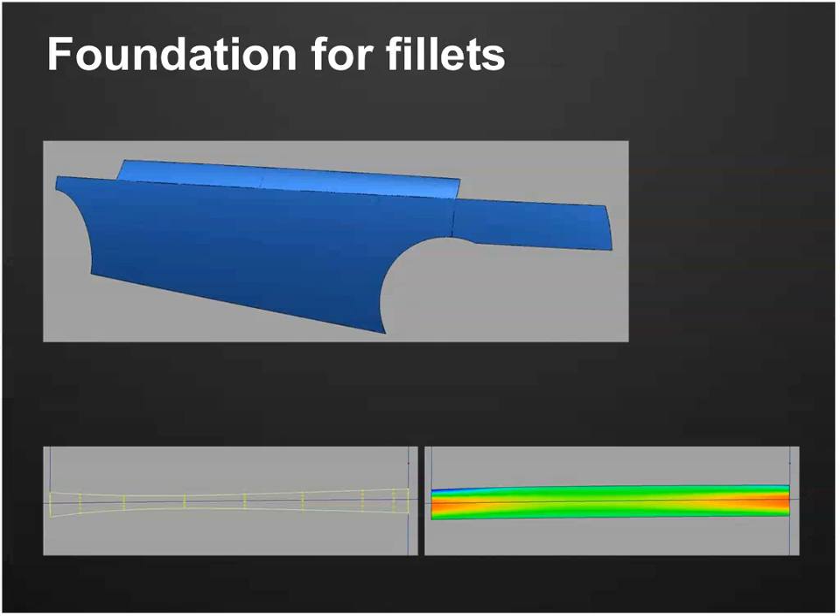When you have two surfaces, this surface and this surface, and you need to make a fillet, it could be that when you just do that fix, you get a trumpet-like fillet, or you get a chord fillet, but with fat highlight, small highlight, and fat highlight, small highlight. That's not very good.

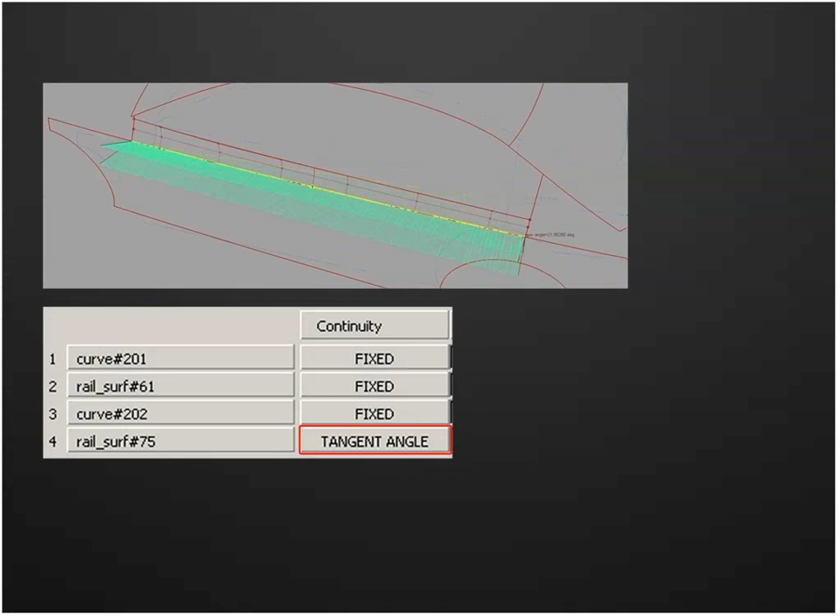You shouldn't do that. It's because the angle between here and between here gets not correctly interpolated. If you want to do that, you have to use tangent angle for this edge and for this edge. Then you see here a correct interpolation from here to here, and that would result in a fillet, in a variable fillet, but which is clean, or with a chord fillet which has clean sizes of highlight, which is necessary to have a clean and beautiful model.

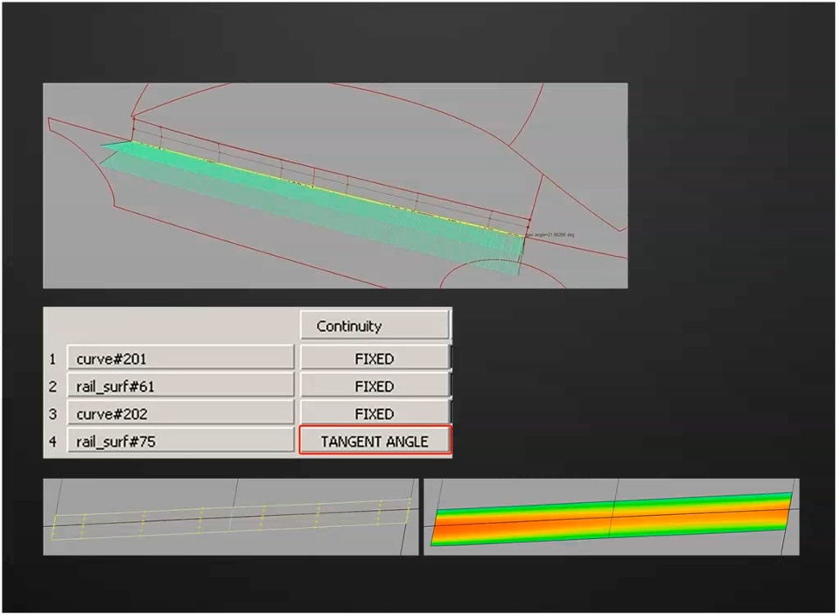So what I want to say, the fillets are dependent on the base surfaces. When you make a problem in the base surfaces, you will never ever be able to reach a good fillet. That means when you do a concept model, you have to make sure that your base surfaces are good. Otherwise, we have to do everything again, and that is not good in terms of the process in a car manufacturer. So let me come to the summary.

And the webinar showed as well Class A methods that can be used to achieve this kind of modeling. I showed you using the align thing for handling tight tolerances. I showed you that you have to have a good foundation for fillets in order to work with tangent angle. And I showed you the trick with the extrapolations, that you can pull and push, or that you can pressure a surface between two flat extensions, and with that you can control the surface.

And then last but not least, or no, that's not true. At the end, I want to say always try to build an intersection so that your patch layout will always be in accordance with the character of the shape. Flat, curved, flat. That has to be there with three surfaces. With this, I'm at the end of my presentation.